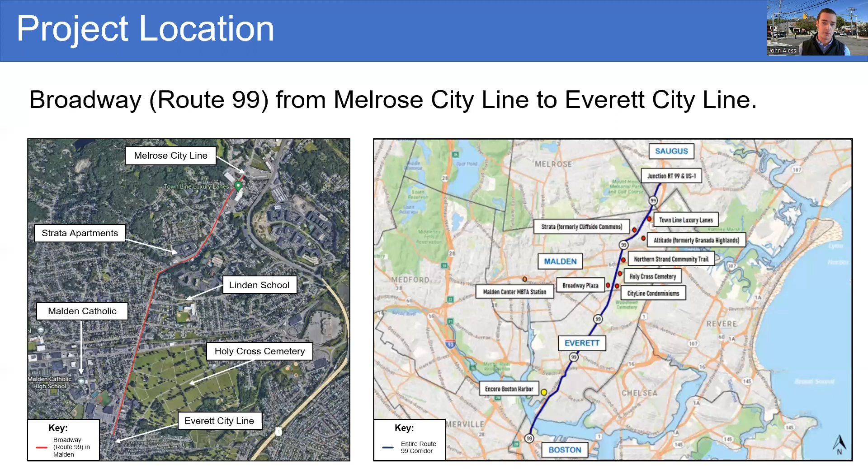For some background on the project, we're talking about Broadway here, which is Route 99. The project would run from the Melrose City Line to the Everett City Line. The map on the left shows, indicated in red, the portion of Broadway that goes through Malden, and I've put in some landmarks to help orient you. On the right, you'll see Route 99 in the greater regional picture. Route 99 not only goes through Malden, but starts in Saugus, connects to Everett, and then Boston. It's a corridor with a lot of regional importance, which is why redesigning a project like this is important not only for Malden residents, but for the region's connectivity and transportation network.

So why are we here tonight? The city is seeking millions in federal funds to reconstruct Broadway to better move people throughout the corridor. And to draft a conceptual design of what we want this to look like, we need to hear from residents about their concerns, ideas for improvements, and the overall transportation vision for the corridor.

I'd like to note that the city is still in listening mode right now, so all feedback is welcome. I know that in the past there have been some images and conversations about how the city has already decided on how they want to design Broadway. That was part of, as an example, the Broadway Corridor Framework Plan, just to show what could be done. But I'd like to make clear that the city has not made any final decisions yet, and we're still listening to residents to get the feedback that will inform how we redesign the corridor.

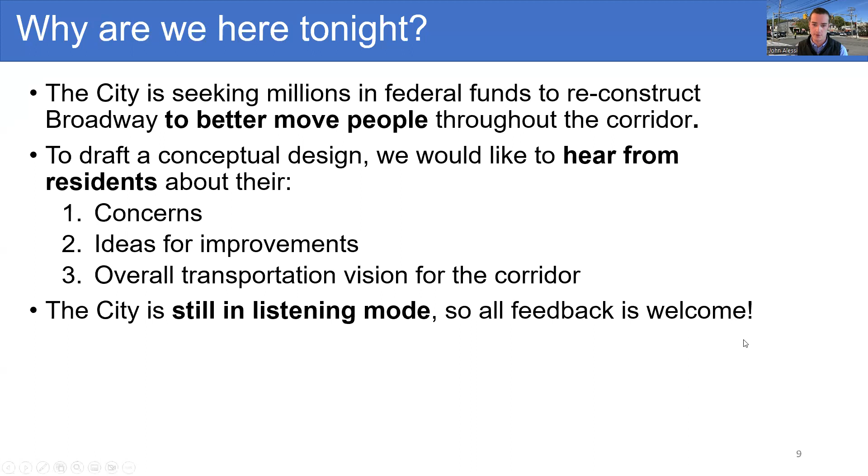So how did we get here tonight? Like I just mentioned, in 2020 we completed the Broadway Corridor Framework Plan, and from that plan there was a key transportation finding. It reads: traffic congestion, speeding, and a lack of general upkeep contribute to a perceived poor quality of life in the corridor. Efforts to make the transportation network more efficient for all modes of travel—vehicular, pedestrian, bicycle, and public transit—would increase economic opportunities and socioeconomic benefits.

Using that key transportation finding brings us to today, where we are working on the Reimagining Broadway project, which has two components: zoning and transportation. And obviously we're here tonight for the transportation portion. So the purpose of our project is to take that key finding from the framework plan and conduct a thorough transportation analysis of Broadway so we can understand the gaps in the transportation network and create a plan to address it with a redesign.

Underneath, you can see there are 3 components of the project: the existing conditions analysis. The city of Malden has been working with our consultant BSC, who have done traffic counts, site surveys, and pavement probes to understand what are the existing conditions today. How many people are driving through the corridor? What's the actual pavement made of? What needs to be redone? So we have an understanding of the corridor itself.

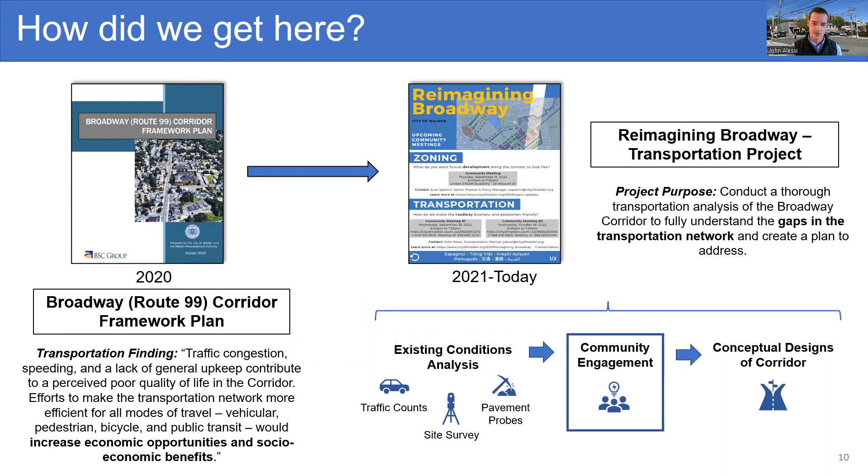Now we're in the community engagement phase, where we're talking with residents to hear about their concerns, ideas for improvements, their overall vision. And then once we take those into account, along with the existing conditions analysis, we're going to be able to develop some conceptual designs of the corridor.

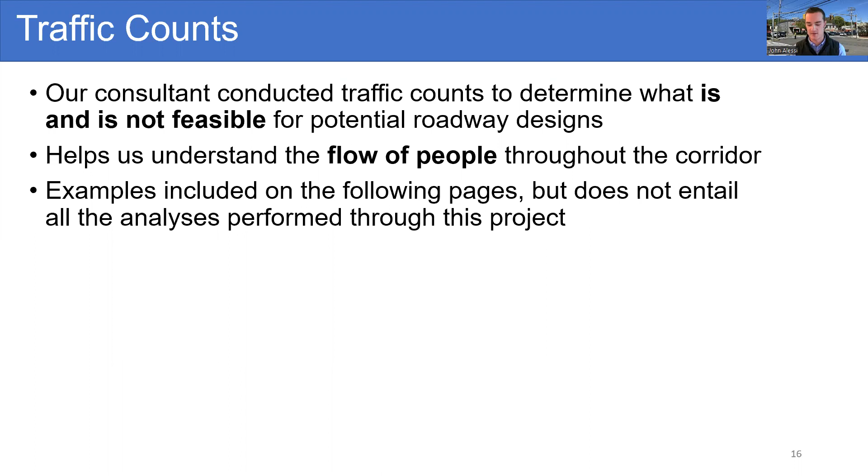I'm going to include some examples from our consultants on the following pages of the results of some of these analyses, but just keep in mind that this is just the surface of everything that's been performed so far.

In this image here, this is a nice visual that was created by our consultants. This is Broadway to the left, heading towards the Melrose City line. To the right is the Everett City line. You can see that the portion of Broadway in between Salem and heading up to Melrose, there are a lot of vehicles there compared to the middle part, and then the southern part. So findings like these are really important to understand where is the majority of traffic along Broadway, so that we can inform parts of our design that will make sure that we're accommodating vehicles, but also other modes of travel as well.

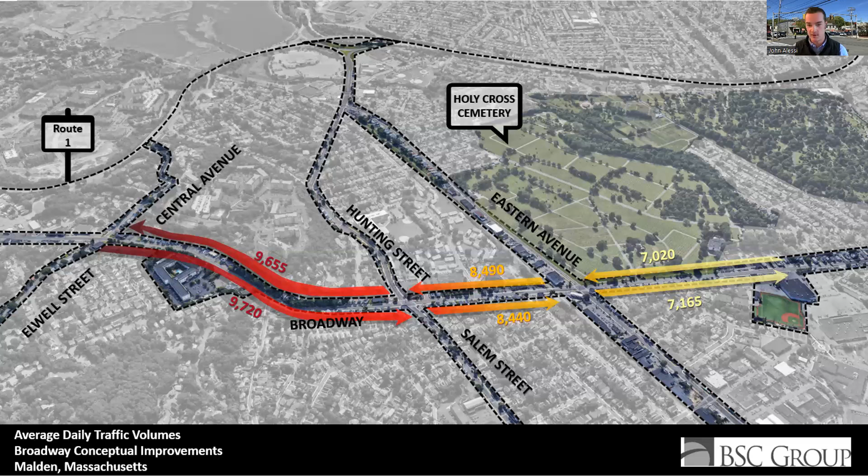Here's another example of the in-depth look they took at traffic along the corridor. This is the intersection of Salem and Broadway. On the map, to the right is the Everett city line, and to the left is Melrose. This image artistically shows how traffic flows through this specific intersection.

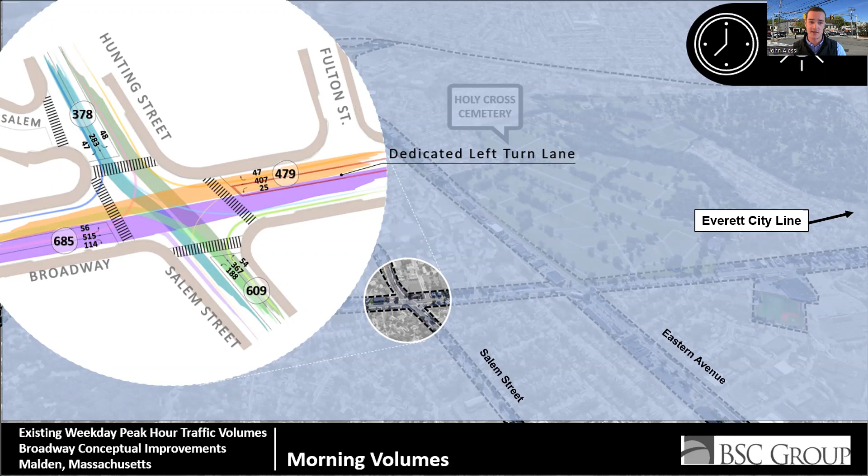You can see that the majority of people are passing straight through the intersection, but there are also folks making turning movements. We've gone in depth with how many vehicles are on the roadway and which way they're going. This example is just one intersection during the morning volumes. These numbers obviously change for different intersections throughout the corridor and at different times, but these are the things we've been looking at to make sure we're making the right decision.

In addition to looking at the road today and the traffic counts, we also looked at crash data, because safety is a big concern for residents, as we've heard so far. I looked at crash data from a 5-year period between September 22nd, 2017 to 2022.

During that time period, there were 368 crashes reported along the corridor. Of those 368, 19 involved a person walking or biking. Taking the average of total crashes over that 5-year period, that's about 1 per week. That's a lot of crashes, so there's definitely room for improvement for safety along the corridor.

In addition, 101 crashes involved non-fatal injury. Thankfully, there were no fatalities, but one thing we should keep in mind when redesigning the roadway is how we can make it safer so that we can avoid the risk of serious injuries or fatalities.

After going through all the existing conditions of Broadway, I want to spend some time going over complete streets, what they mean, and why the state and federal government are funding these, and why they're important to making sure we can make Broadway accessible to all modes, all types of people, and people of all abilities.

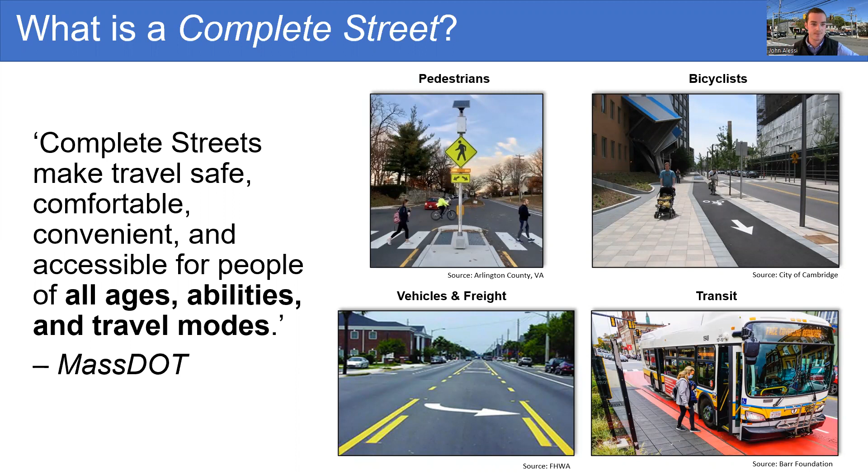Why are we thinking about complete streets? First, they prioritize safety because they provide all of these modes adequate facilities and reduce travel speeds so that all users and modes can safely use the street together. They also connect a lot of the destinations within a city: home, work, school, shopping centers, restaurants, recreational areas, everything. Third, they improve the desirability of a community for residents of all ages, stages of life, and abilities.

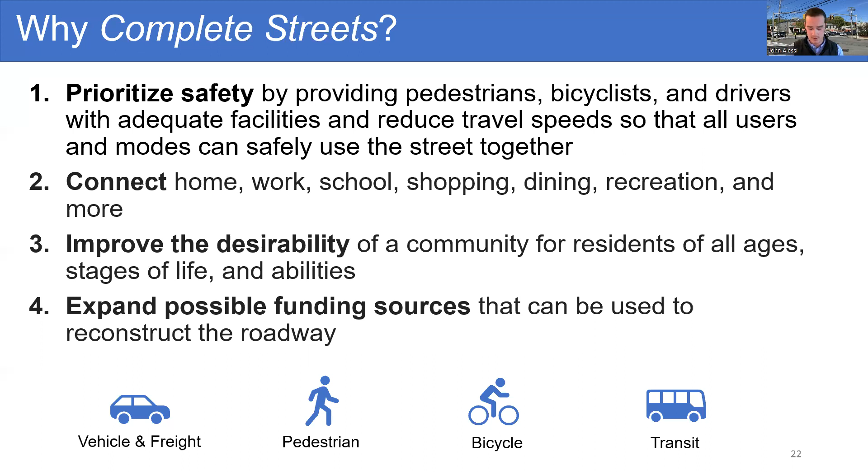And fourth, complete streets expand the possible funding sources that can be used to reconstruct the roadway. I'm going to touch on that a bit later, but that's a key thing to how we're going forward with redesigning Broadway.

Within Malden, we actually do have a complete streets policy. The City Council and Mayor Christenson unanimously adopted a complete streets policy for Malden back in 2016. You can see the first excerpt here: the purpose is to accommodate all road users whenever reasonable and financially feasible.

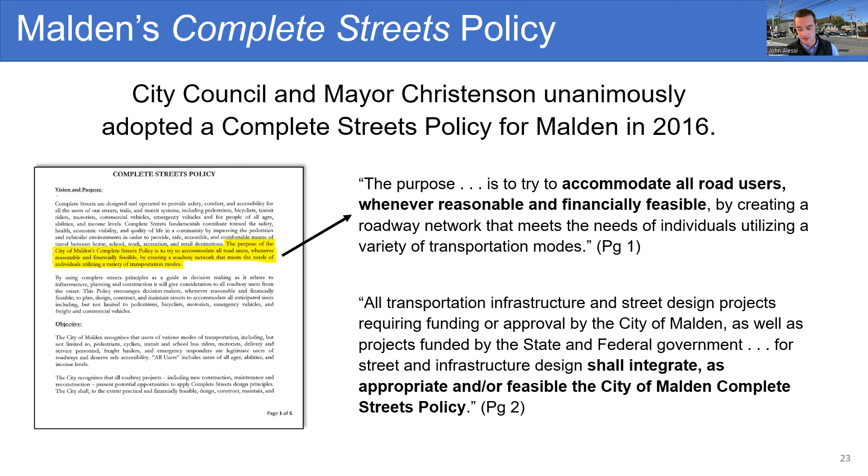A second excerpt I took from it is that all transportation infrastructure and street design projects requiring funding or approval by the City of Malden, as well as projects funded by the state and federal government for street and infrastructure design, shall integrate, as appropriate and feasible, the City of Malden Complete Streets policy. So it's important to consider complete streets elements not only for the 4 reasons I mentioned, but also because it's a policy within the city that we are considering as we redesign Broadway.

And not only is it a policy, but it's a Malden standard. So in 2017, the city developed a complete streets prioritization plan. This plan identified many projects that we could implement as complete streets. And since 2018, we've received $400,000 in grants to complete these types of projects.

Some examples include the crossing at Northern Strand with the flashing beacons to help alert drivers of crossing trail users, at the intersection of Salem, Ferry, and Main Street. There are curb extensions that shorten crosswalks and slow vehicle speeds, making it safer for those on foot or biking. And then at Main, Winter, and Forest Street, there's a center median refuge, which segments the crosswalk and makes a safer crossing for pedestrians.

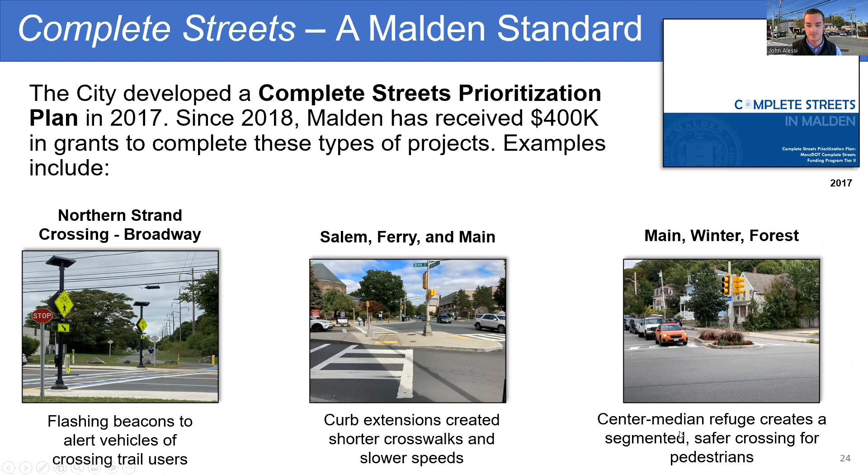I'd also like to point out that the state and federal government funds complete streets projects. Complete streets projects are competitive projects that receive millions in federal funding from the Boston MPO through the TIP. I'm going to explain those two things right now.

The Boston MPO votes on which projects to fund, and they prioritize complete streets projects. Federal funds are vital towards constructing multi-million-dollar projects, and this is how the city feels we can fund the reconstruction of Broadway using minimal local funds. So to summarize, adopting a complete streets design for Broadway, when possible and feasible, allows Malden to compete for millions in federal funding to reconstruct the roadway.

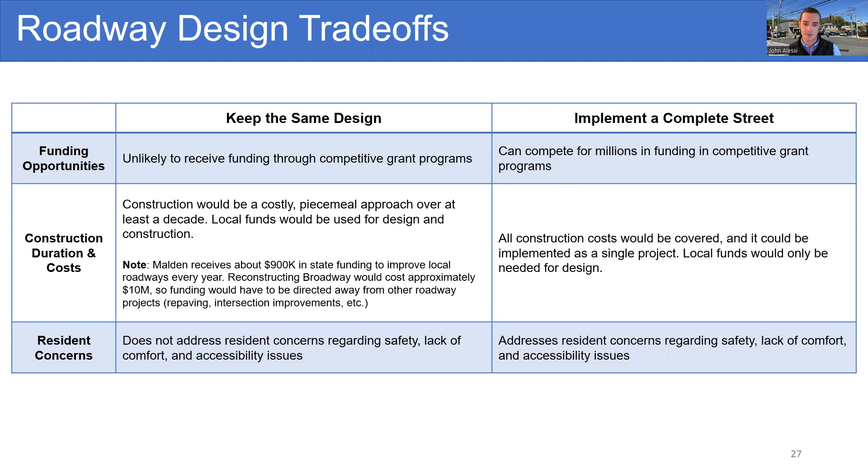This is the portion of the meeting where we're trying to get information from you, the residents. We want to hear about your concerns, ideas for improvement, and opportunities. I'm going to give you an idea of some of the things we've heard so far. I won't go through this entire list, but residents have concerns about gaps in sidewalks, crosswalks, traffic spilling over onto local streets because the traffic signals aren't able to efficiently move vehicles through, overgrowth on sidewalks, and no sense of place.

We've heard from not only residents, but the principal of the Linden STEAM Academy, which is right near the Broadway and Salem intersection. I've spoken personally with the crossing guards at the intersection of Broadway and Salem about the really big safety concerns they have for students crossing at that intersection. We've gone through all the See Click Fix comments online. I've spoken to the chief of police, Glenn Cronin, and Lieutenant Tuxbury about some of the concerns they have. We've heard a lot of these things through the Reimagining Broadway zoning portion of the project, and also through the Malden Transit Action Plan.

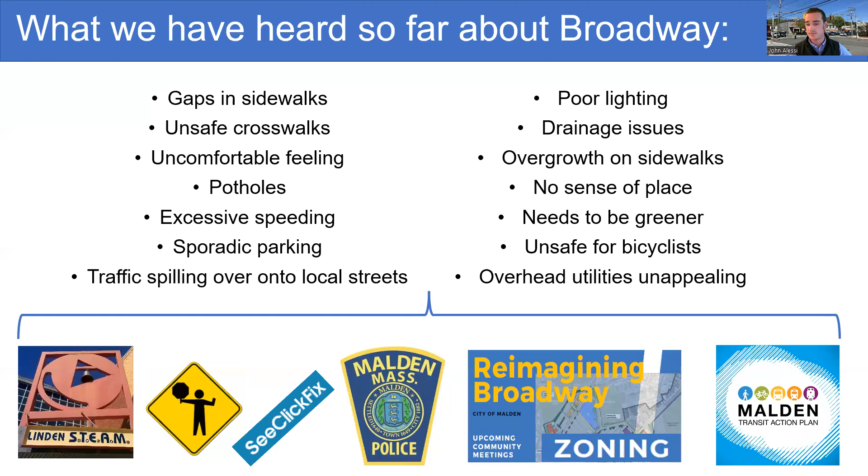So again, the city is still looking to hear from residents, and we'd like to hear what concerns you have, what ideas you have for improvements, and your overall transportation vision for the corridor.

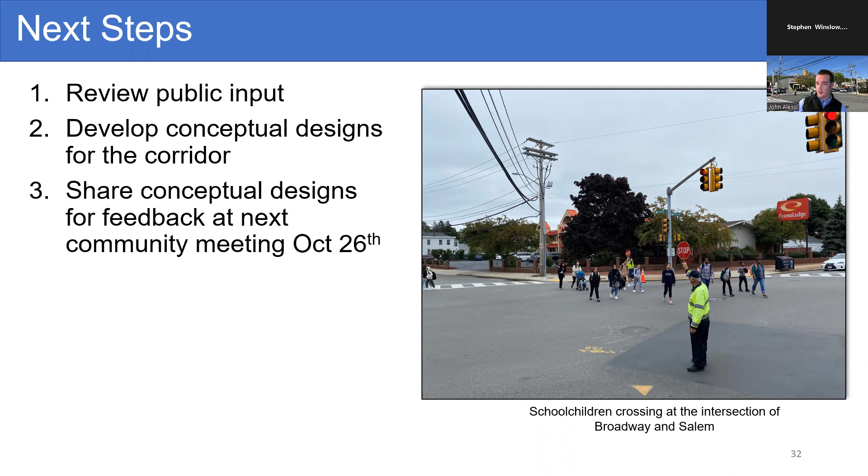So we're going to collect all of this together and develop conceptual designs for the corridor with our consultants. We plan on sharing these conceptual designs for feedback at the next community meeting happening on October 26th, same time, 6 to 7:30 p.m. That will be held virtually, but we'll look into other ways for residents to participate and provide feedback.